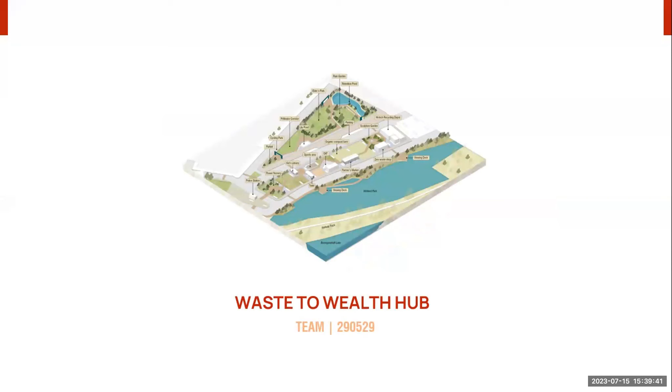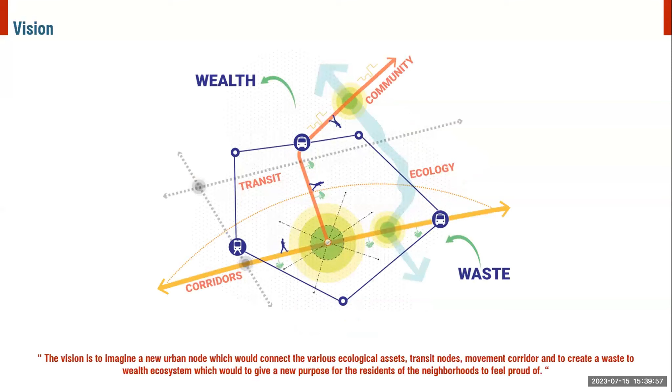The objective is to create an innovative urban node that links diverse ecological resources, transit nodes, and movement corridors, generating a waste to wealth system that gives citizens an alternate reason to be proud. The area level strategy aims to implement sustainable waste management practices that engage local communities and optimize infrastructure to preserve the lake's ecosystem and promote a circular economy.

During community interaction, the elders spoke about their aspiration to utilize this area for a better purpose. Taking cues from this, our broader area level strategy was to first tie up the various assets surrounding the site - the lake and its fragmented wetlands, Kasturi Nagar Park, Vivekananda Park - and finally connect it with transit nodes such as the upcoming metro station via pedestrian linkages, enhancing the everyday experience of residents.

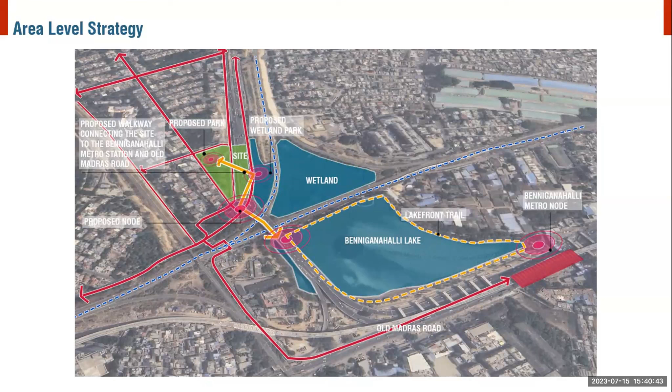Keeping this in mind, we tried to resolve movement-based conflicts initially by redefining the ROW of the highways and surrounding access roads - rationalizing the carriageway, providing adequate footpaths, parking zones, and safe pedestrian crossings. We also dissolved the junction to achieve safer pedestrian flow by providing a tabletop crossing.

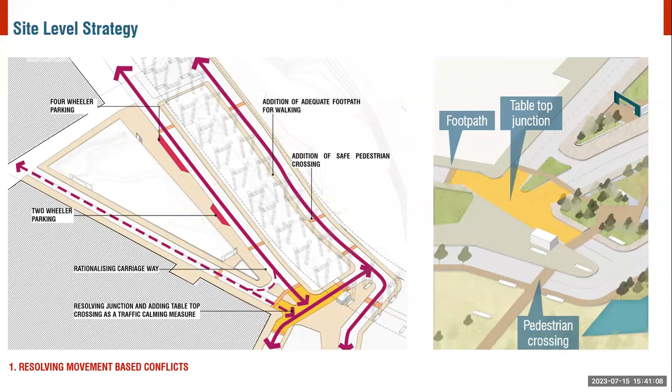We also tried to add new programs to attempt an ecology and economy around waste. Instead of removing the whole waste processing unit, we integrated it by providing a high-tech waste recycling unit from which inert waste will be used to produce public art, which can be reused and sold at the zero waste shop.

The organic waste from all over the site will be treated in an organic compost farm to promote urban farming, from which fresh produce can be used in a farmers market and organic cafe to promote recreational activity.

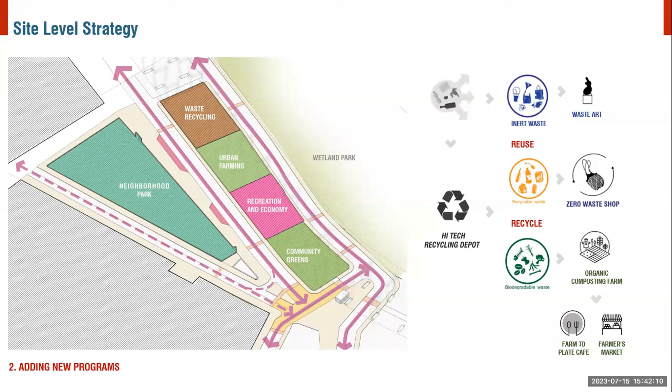Moving to the next strategy, we connected the new programs via a green loop, which will act as a common pedestrian path connecting all the existing and proposed programs.

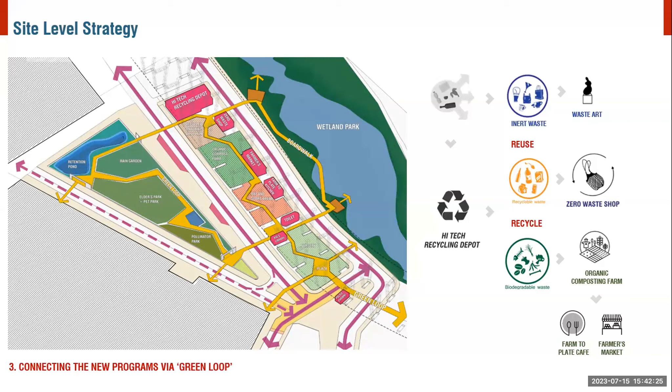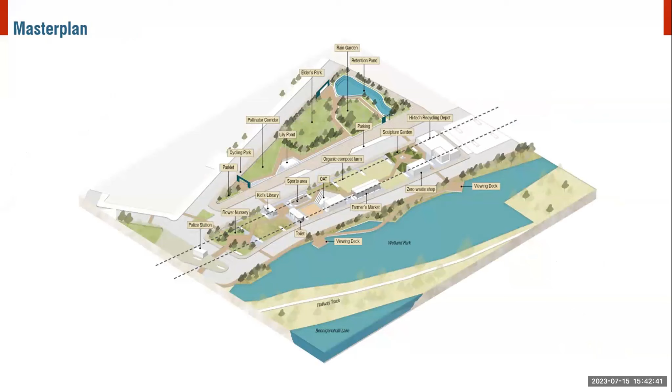Finally, the urban master plan - we've tried to weave all the functions and programs into all three zones of the site. This is a view of what we're trying to achieve.

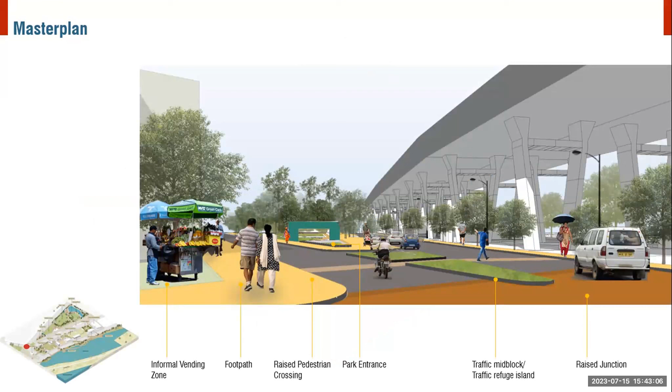This is the view of the sculpture garden and the organic compost farm. Finally, this is the view of the park, where we've tried to show the pedestrian trail connecting to the under-flyover zone. Finally, the impact assessment shows what we try to achieve on site.

The whole aim of the project and how we try to see it is to use waste as one of the main sources that is not shied away from, but actually integrates the whole community.

And we've also... Your voice is breaking. I'm sorry, but your voice is breaking. Oh sorry, I'll repeat that.

The whole aim of the project was to use the existing waste segregation zone and allow more people to get engaged in that specific function rather than shy away from it. By doing so, we also tried to enhance the walkability and reduce the dead and inactive spaces on site, which generates income and provides job opportunities for localites. Overall, we tried to attain more eyes on the place to increase the safety of the site and the livability of the whole neighborhood. Thank you.

Thanks. We have a question from Aniruddha already. Could you address that? Yes, what was the question?

Have you interviewed the garbage collector of that area or any other sample for understanding the existing garbage management?

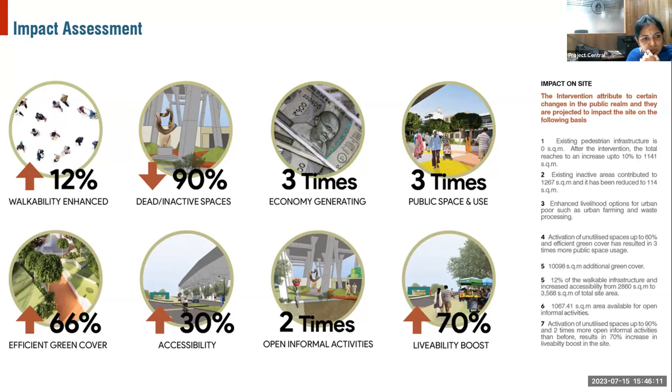That wasn't in our scope. But when you make a provision for composting, because composting, when it starts decomposition, produces smells and all. How much quantity can be handled, because it's daily waste that is coming there, so the area that has been allotted for that also has to be considered.

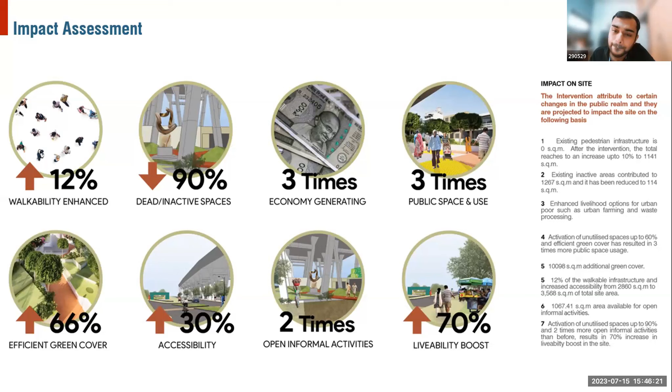That is one point. And the second point is about the farming you have suggested - what kind of farming, and who is it for? Is it for the neighborhood, or is it someone from the government side who needs to get them there? What actually does your plan say?

For the organic compost farm, we thought not from the neighborhood directly, but there are a lot of squatter settlements around the site, on the adjacent edge of the railway track towards the Benniganahalli Lake. We were looking at those squatter settlements and thinking what if we integrate them into this process, because the main idea was to integrate the urban poor. Therefore, this organic compost farming and related activities like selling the produce will become an alternate income generation for them.

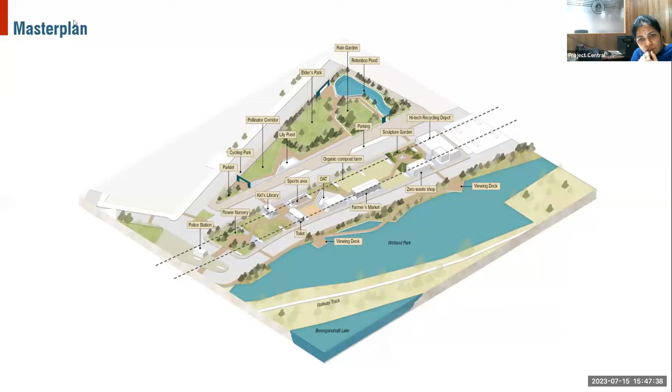Also, one more question I had, one for the previous presenter as well - the wetland, what actually is shown here? Is it a buffer of the railway department?

So at present, when we went to the site, we saw there was already a ditch there, and the drain coming from the Kasturi Nagar neighborhood had the entire grey water going directly into this ditch. We thought of treating that by making constructed wetlands so the grey water gets filtered, and working around its edge to make it a more attractive wetland park.

Rajiv, I believe you had a question. I'm still a little confused about this whole wetland section. My question was, if you see the Raj Kaluve extending and the canal extending to the other side, it has a dead end. Is that something continuing underground, or is it actually a dead end, meaning there is stagnation of water creating other issues in terms of maintaining that?

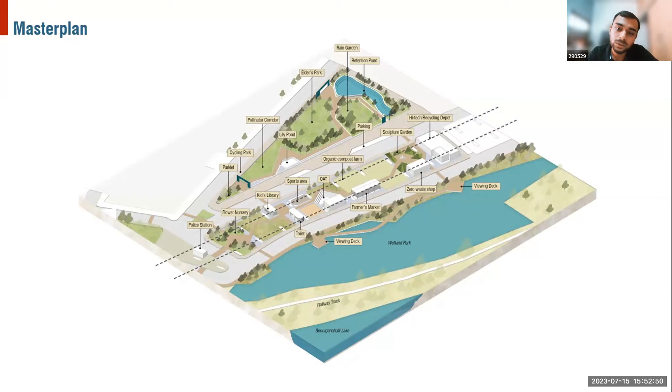One of the things that came up in the discussion with the community was that they did not actually want a dry waste center there at all, because it wasn't catering to that want. So in a way, by expanding that, you have to justify that the land they actually want used for recreation and other things is going towards some other purpose.

And the way you're describing the high-tech depot, it's sounding the same as the dry waste collection center. I don't know what the difference is. The other point I don't understand is what farming under the flyover means, because it's not as if you get sunlight there most of the time. So for me, there's dissonance happening right there.

I also don't see the Raj Kaluve extending itself from the park to the wetland in your drawings, so I see that missing.

Fourthly, I think the imagination of the wetland park, the way you've drawn it right now, is closer to a lake, which to me sends the wrong signal to someone looking at the drawing if they don't know what's happening here. Because if you look at the site right now, the water from that wetland is actually draining into the Benniganahalli lake. There is actually a hole where it goes through, but the level would be much lower, and it's not as if you'll actually see much water at all. So for me, the drawing is sending a false impression of the reality, even if we implement your design.